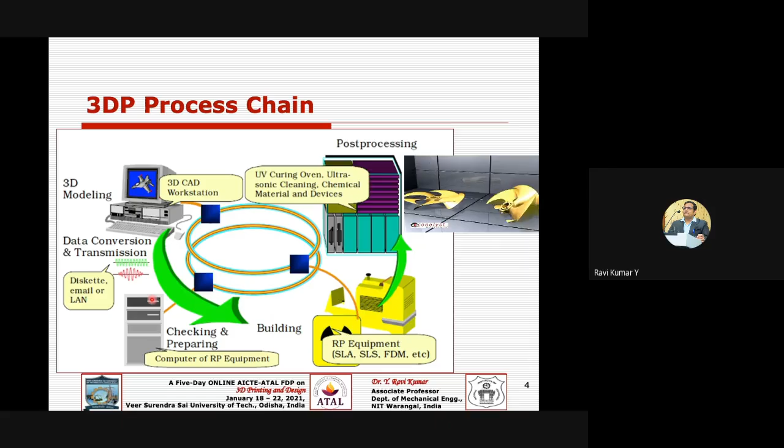Say, how do you get to design your product? Typically you may use a 3D model capture method, otherwise called a reverse engineering approach, or 3D scanning, or 3D digitization systems, along with some software or tools like Kinect Fusion or Autodesk ReCap, or any other tool that will support your 3D digitizing systems. If some physical product or physical object is already there, you just want to capture it, scan it, to get digital data. So that may be one of the methods to get your design.

Or you can go with a CAD modeling route, so you can do it right from scratch. You can use software like Blender or Fusion 360 or Rhinoceros or whatnot, like Creo, CATIA, or whatever software you are familiar with or have with you. Then you can do modeling right from scratch. So that may be another way of getting your digitized data, either through model capture or through a CAD modeling approach.

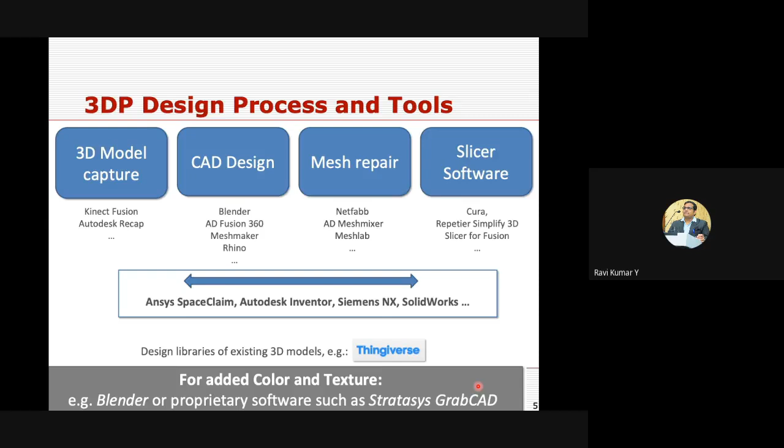And then we'll talk about some of the design tools. I hope everybody is familiar with these CAD design tools. Typically, you may use them for your routine CAD/CAM/CAE applications. You start with modeling. You can have 3D modeling, which can be a wireframe, a surface, or a solid model.

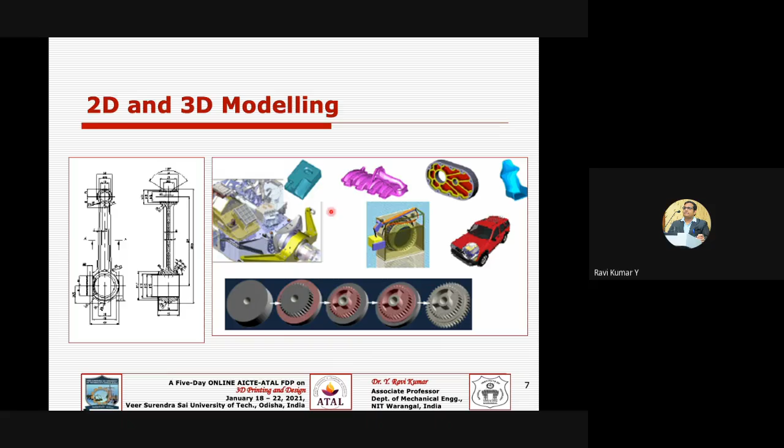You can make use of several software packages, maybe some freeform or artistic software or multimedia kinds of stuff like Maya or 3D Studio Max. Blender is another open source software you can make use of, and Tinkercad is another free option. And of course, you have proprietary CAD/CAM/CAE software, or even Onshape, which will even run on an Android based platform. You have plenty of tools and software available to get started with your 3D printing designs.

And as we know, 3D printing technology has some unique advantages. What are those unique advantages? You are probably very familiar with modeling methodologies like parametric modeling; the CAD, CAM, CAE software may use this kind of parametric modeling design, or in recent times generative designs, where you can consolidate a number of parts into a single part.

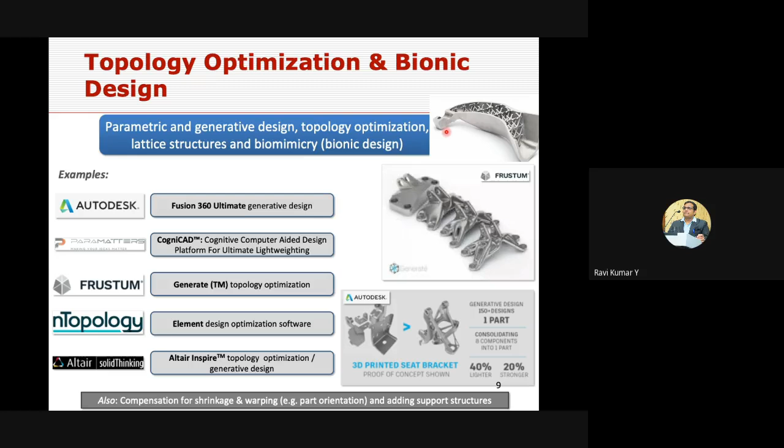And you may have several topology optimization tools or software like Altair OptiStruct, and several other software available for topology optimization of designs. So we can link these topology-optimized structures to 3D printing. Why? Because they are easily fabricated through 3D printing.

Of course, as we already discussed, you have model capture tools like 3D scanning devices, 3D digitizers, or reverse engineering, whatever you name this process. Then we can get physical objects digitized. Initially it is in terms of point clouds, and further it becomes an STL file. Then it can be sent to CAE, CAM, or 3D printing applications, wherever applicable. Then you can make use of this digital data derived from a physical object.

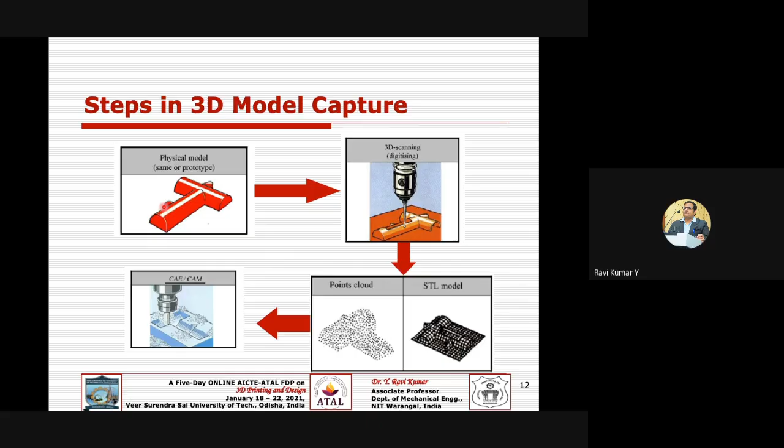You may use several scanners and sensors to capture your data, right? Maybe physical touch probes, laser beam probes, or optical CCD cameras, or in medicine, CT scanners can also be used here, getting digitized and converted into an STL file, which is needed as input data for 3D printing technology.

You may use 3D scanning software like Geomagic, Kinect Fusion, ReCap, and several packages available to reconstruct your physical models, converting physical models into digital models. So you can reconstruct them using these tools.

And repositories, as we mentioned: you can go to their website or repository community and download from GrabCAD or Thingiverse and many places where you have millions of STL files or native formats like .prt, IGS, or STEP file formats, which you can download and print on 3D printing machines. And of course, medical is another area where this technology is very popular nowadays.

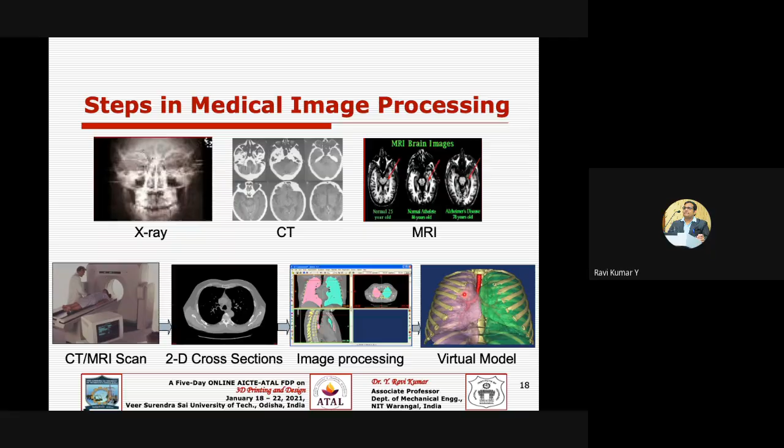It can even be interfaced to CAD to design custom implants, or surgeons may want to simulate the surgery or generate 3D computer models, or an orthopedician may design an implant or bone and want to test it against failure. Then you can interface with FEM or CFD analysis to study blood flow in cardiac cases, or neurosurgeons, orthopedicians, or oral maxillofacial surgeons can do finite element analysis on the patient data.

And further you can get these physical models printed, to make use of them as a surgical model or rehearsal model, or for designing an implant, or designing a surgical guide template, or some patient-specific surgical instruments. So you can do several things here based on the data captured from the patient, and further they can do some design validation on that patient data.

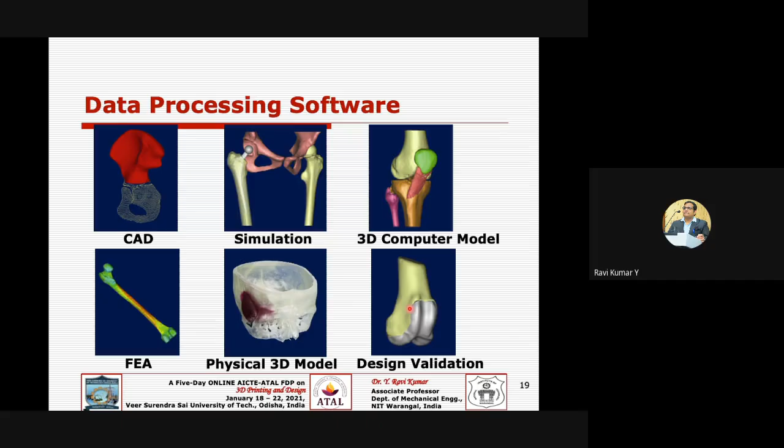And you may use several tools for this medical image processing, maybe Mimics software, and you may have 3D Doctor, Simpleware and other tools. And of course the open source software in this domain is 3D Slicer, with which you can perform preliminary operations like converting your medical scanned images, saving them as DICOM images and further converting them into an STL file. That is needed for the 3D printer to print the model. So you can make use of these tools to do that job.

Then we'll focus on the STL file. The STL file is typically about interchanging this data. Why do you want to interchange this data? This is quite common in the case of an office printer. An office printer can print a document, a JPG, a PDF, a PPT, but how is it recognized by the printer? Of course, it gets converted into PostScript form, the printer can understand that PostScript form, and then it is printed.

In a similar way, the PostScript in the case of 3D printing is the STL file. STL stands for stereolithography. You should save this file during your modeling phase itself as a .stl file. So what is a .stl file typically? Any design data must consist of geometric information, color, texture, material information, and so on. But unfortunately, the STL file doesn't support all this; it supports only the geometric information.

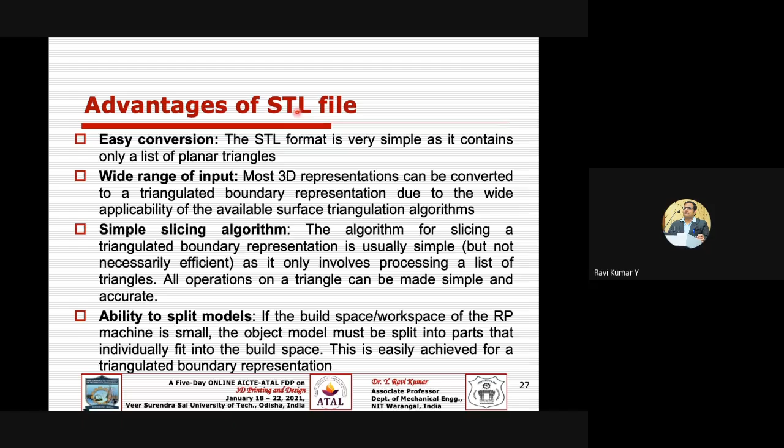And though you may have these advantages, definitely you have several problems also. We can divide the problems into three broad groups. The first one is the representation related problem. You are approximating your model, not taking the design exactly. Because you're doing an approximation, the curve is not recognized as a curve the moment you save it as an STL file. You cannot do anything about that approximation, but definitely you have that error, the approximation error.

And then you have some problems which are intrinsic to the STL file format, like file size, truncation error, incompleteness, inconsistency, inconsistent normals, and incorrect normals. We'll discuss these in the upcoming slides.

And some of the problems may be related to your tessellation algorithms or your data conversion algorithms, which are embedded in your software. So maybe some gaps or some internal walls or some degeneracy in terms of geometry or in terms of topology, or some incorrect intersections of these triangles. So these are some of the problems that we'll discuss one by one.

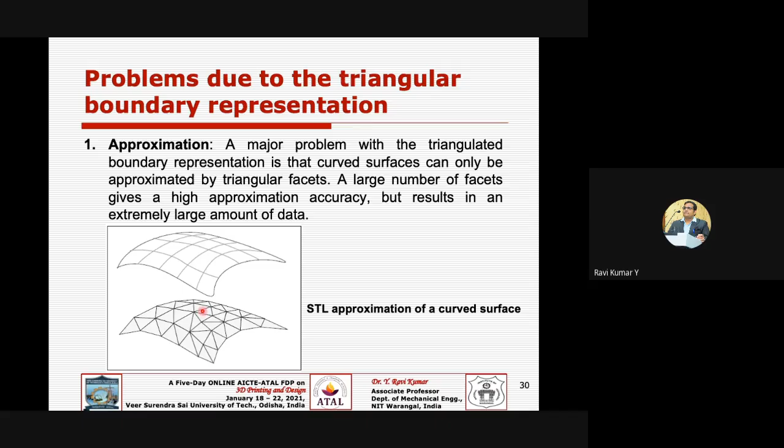And then you may have intrinsic problems, like the file size is too big. Why? Because you have redundancy in the file. Why do you have redundancy? That is the syntax and semantics of the STL file. It must satisfy the vertex-to-vertex rule. Then obviously you may have redundant triangle information, or redundant triangular side information. So it may be more bulky in size.

And one more problem may be truncation error. Say you as a designer have supplied your dimensions as double precision real numbers while designing it. But the moment you saved your model as a .stl file, your double precision real number may be truncated to a single precision real number, so you have truncation error.

And your STL file is not a complete representation. What do you mean by that? Though it has geometric information, it is lacking topology information, that is connectivity or associativity. So the STL file doesn't support topology information; it supports only the geometric information. So that is the incompleteness. And because topology is lacking, your slicing algorithm has to do an extra job. It should first sort all your coordinates, and only then will the slicing be started. But anyway, you have incompleteness because it doesn't support topology information.

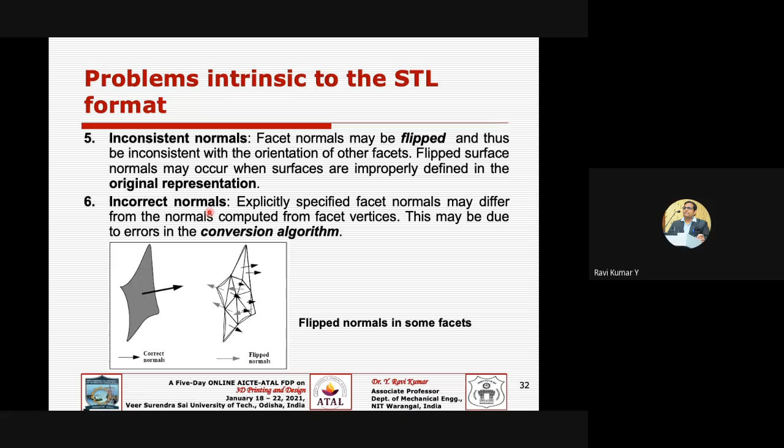And of course your data conversion algorithms may produce gaps or missing triangles, especially wherever you have one surface and another surface, at the mating of these two surfaces. Say this triangle might have been missed. Once you have a missed triangle and you try to slice this, imagine I start my slicing, cutting this plane at Z0, and then Z0 plus my layer thickness. This is the position of my slicing plane. Like that, I can get the intersection point of my slicing plane with the triangle edge.

Say for example I have started somewhere here. This is 1, 2, 3, 4, 5, 6, 7, and 7 and 1 again must coincide. Why? Because only then will it ensure that you have a closed boundary. But unfortunately, a triangle got missed and it has formed a gap. Now it has become a puncture, it's not a watertight model. It has become a defect here.

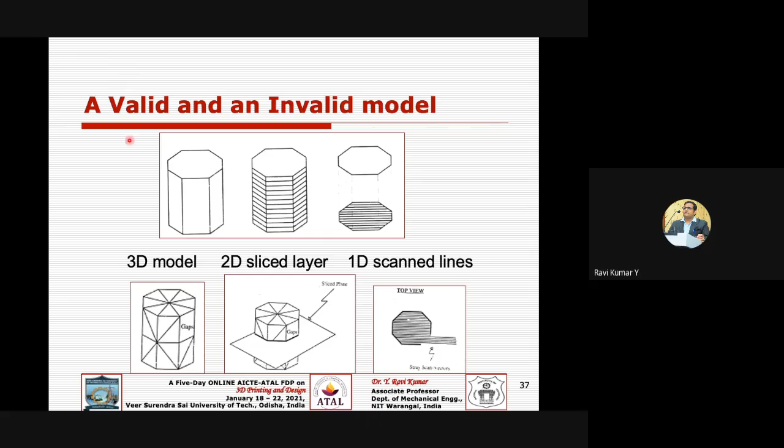And then you may have challenges regarding STL files, like duplicate information, leaks or inconsistency, which we have been talking about. And it does not scale well when you are using high resolution data, or even lattice structures in your model; it may not give you a better result with STL files. And it doesn't support any color information, right? Additive manufacturing, 3D printing machines can print in different colors, different materials and orientations, but STL does not support these kinds of attributes. So what is the solution for this?

ASTM, as we know, is the American Society for Testing and Materials, and ISO also. As we know, this technology started in the late 80s with the name rapid prototyping. ASTM formed a committee called F42, and they are working to develop and publish standards for 3D printing or additive manufacturing parts. It was formed around 2006, 2007, and after that ISO joined, but we still need to evolve several standards; only then can one understand whether you made a bad part or a correct part, once you have some comparison in terms of standards, right?

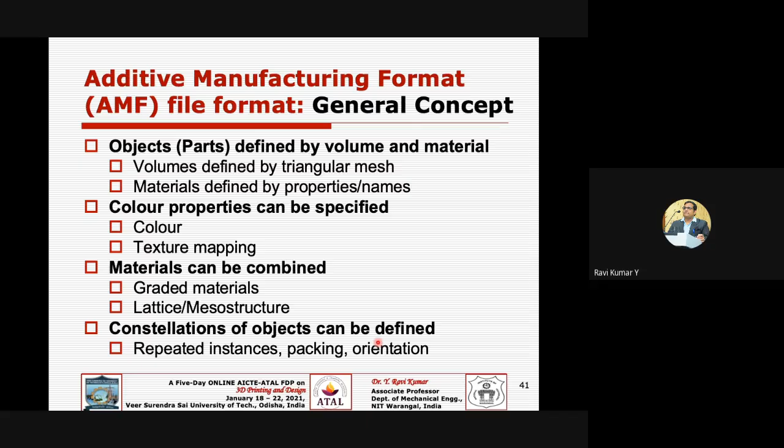It will also address the duplication of vertices, and it will also address any leakages of the mesh, if your file consists of some leakages. And if it has some duplication, it will also be easily identified and can be removed, and it can even be compressed at very high rates.

Say I have a typical file, and one time I have saved it in the ASCII STL file format. Typically it may consume around 780 to 790 KB, and the same file, if I save it in binary format, may consume only around 200 KB. If you save that file in the .amf file format, it may typically be in between these two.

But if I try to compress these three formats, you can see the ASCII file may be compressed to around 100 KB, binary to around 50 KB, whereas my AMF file will be compressed to around 25 or 30 KB. So this AMF file format is more compressive in nature.

And then how do you address your geometric accuracy problems? Previously we were discussing the STL file, which is made of planar triangles, and you will obviously lose accuracy if you have some curvature like this, because that curvature cannot be replaced with the edge of a triangle, right? So there is always a deviation or an error. How do you address such a situation?

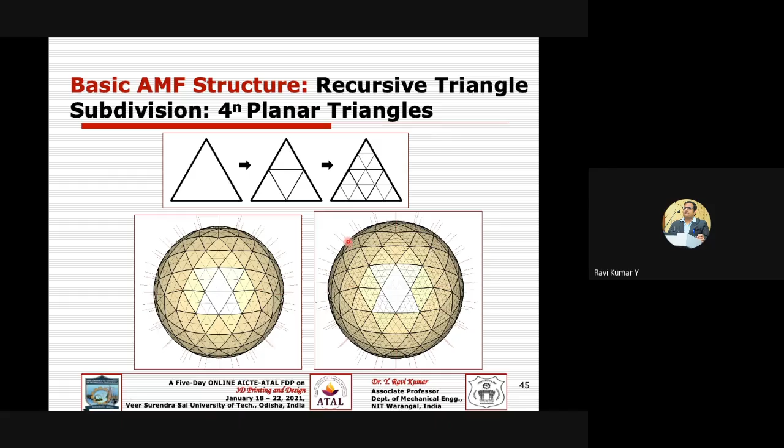And if you try to estimate the error, take a typical unit sphere, save it one time as an STL file, and quantify the cumulative error of the sphere: STL may give more error than AMF by single fold, double fold, triple fold, and so on, whereas AMF has almost negligible error. So in that way, your AMF file is better and will tackle the geometric inaccuracies.

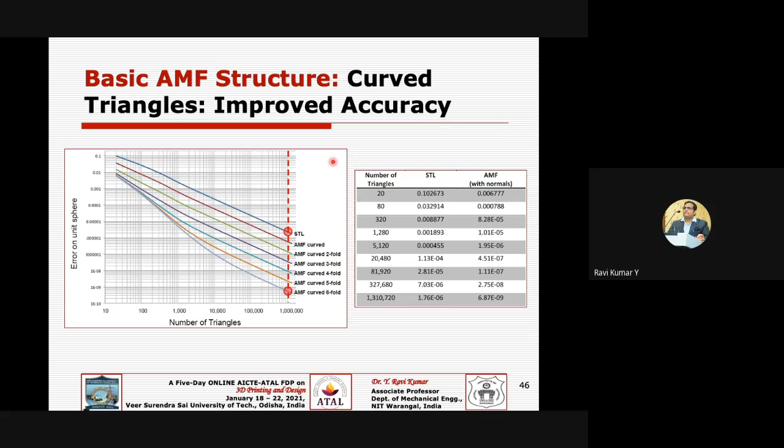And multiple materials: you have a provision here to represent, say, one region with one material and another region with another material. Why? Because some 3D printers can print in multiple materials. So in that case, my CAD file must also represent a particular region with one material and another region with another material. So I can assign my materials here; multiple material assignment is also possible with the AMF file structure.

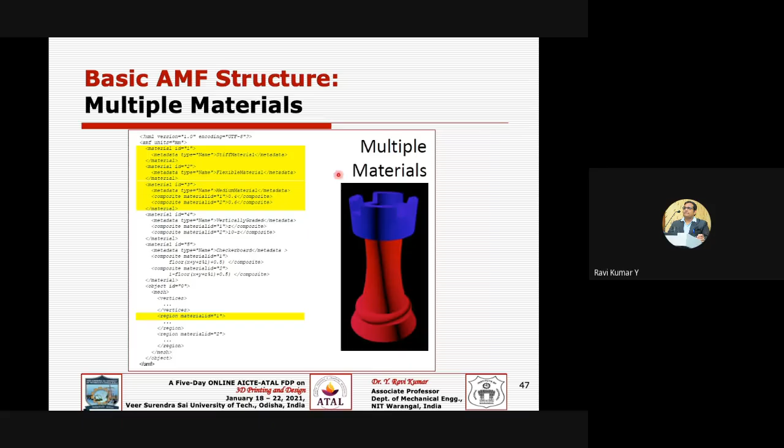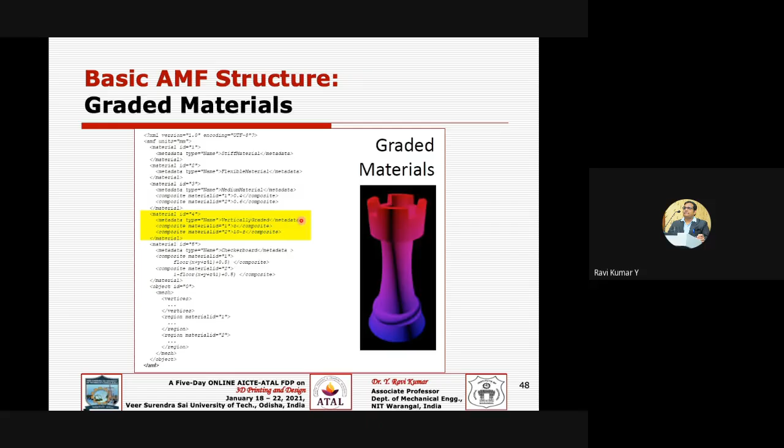And not only multiple materials: if you want to do some grading, varying the composition, you have material A and material B, and I want to vary the composition and represent it in my AMF file format. That can easily be done with this kind of AMF file format, representing functionally graded materials. It even supports microstructural representation. So if I have some microstructures in my texture mapping in my model, that can be easily done in this AMF file format.

And then what is the current status of this AMF file format? Actually, the first version was released in 2012. So now they are doing tests for adoption. And in recent times they have even introduced the second version of this AMF file format.

Then what are the advantages of these standards? As we know, standards take the industry to the next level. Say, for example, you have an aerospace application, a jet engine. You're trying to make some jet engine parts, but who is going to give certification or qualification that those jet engine parts can be flown in the air? Some kind of authority, say the FAA, the Federal Aviation Administration, or some regulatory authority which can issue certification or qualification of these parts.